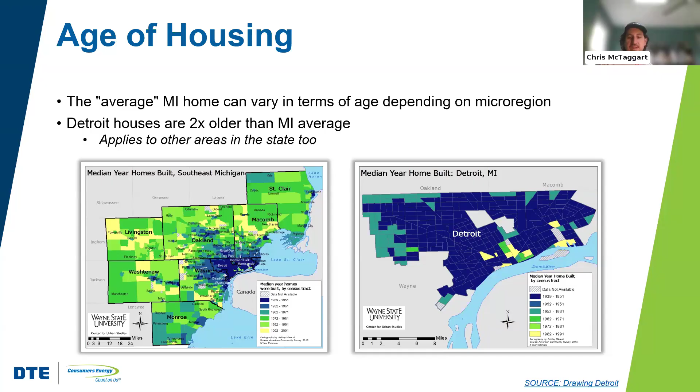Well, it just so turns out that the older the homes are, the more energy intensive they are. And energy intensity is sort of a different way of describing inefficiency, or rather efficiency.

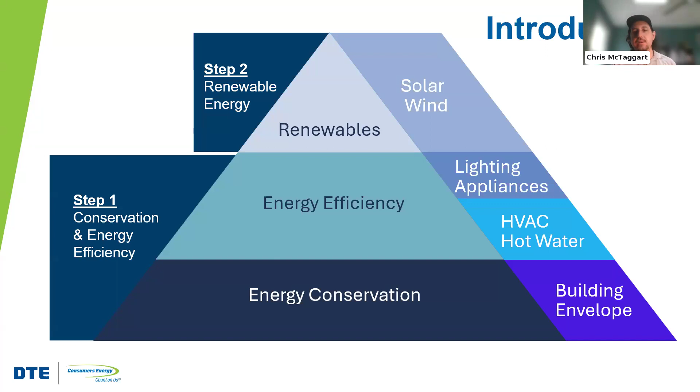I am not feeling drafts in particular right at the moment. So keep that in mind, that reduction in heating and cooling loads can also be a good surrogate for looking at comfort improvements.

You probably want to think about costs. Obviously it depends on the customers. Some customers don't really care - they want the comfort, they want the modernization of their homes, and they believe in energy efficiency for either philosophical or environmental reasons. Consumers who may be renovating their homes may not necessarily care if it's exactly going to pay for itself. They may just think it's the right thing to do, or they may have other motivations. But I think for most people, they're still going to want to understand what their ROI is.

And then finally, how do we scale these upgrades? What order of operations do we do?

So it's leaky, probably. Now, if you haven't done enough existing home audits and things like that, you have to be careful about broad generalizations about air tightness. You can have really leaky new homes, brand new today. It's less common, but it can happen if people have tongue and groove ceilings, and they just don't have a really clear air barrier. You can have pretty leaky homes, or somebody has a big giant chase running to an attic that the code officials missed, and the builders missed. You could still have very leaky homes today.

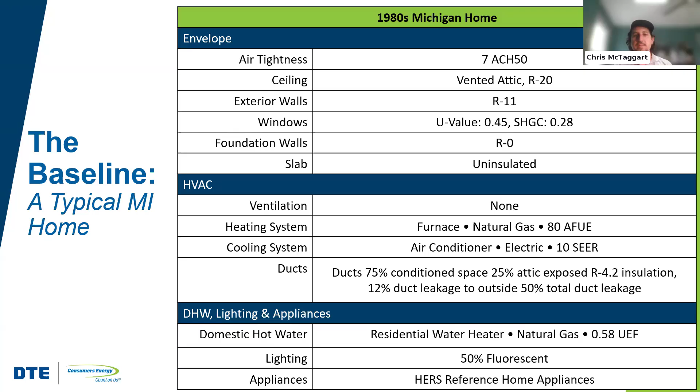All right, so here's how the bills break down. So this is sort of an early 80s home here. We've got a lot of energy going to heat, not surprising. We've got a lot of energy going to lights and appliances, and a little bit going to cooling and water heating. You may go, wow, that's surprising.

I would have figured there was more going to cooling, but we don't have big cooling loads. We just don't. Now, a lot of this depends on occupancy. To be honest, this comes from sort of how the HERS procedures look at a lot of this stuff.

So like the thermostat is set to 78 degrees within the HERS procedures. Yeah, I know a lot of other people who are running it down to 70 degrees for cooling. So it really depends on the user. So take that with a grain of salt.

But I think the point here is that 50% of your costs are going to heating. And that's pretty true. And our index score is about a 130. Look at that, just about what we were sort of riffing on, that probably the average home from the 1980s would be about that. For our heating load, we've got 80,000 BTUs per hour.

So probably the home has 100,000 BTU or maybe even 120,000 BTU per hour, 80% furnace. A big old sucker that makes a lot of noise every time it turns on. And then for cooling, yeah, they probably have a 3-ton, maybe even a 4-ton system installed.

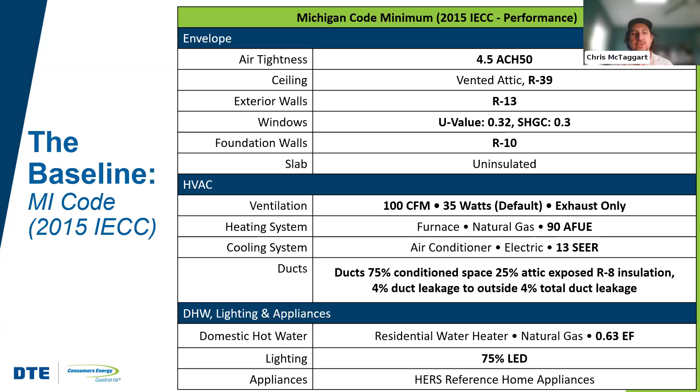So what could we do from a retrofit plan? Again, this wasn't necessarily the retrofit plan, this was just sort of showing you a baseline Michigan performance code home.

So for our retrofit case, here's what we're going to do. We're going to improve air tightness, attic insulation, leave the exterior walls, leave the existing windows, upgrade the foundation walls, put in ventilation, put in a good furnace and a good air conditioner. Nothing crazy and superlative, but we're going to make improvements. We're going to seal the ducts really, really well down to sort of Energy Star levels, improve the duct insulation to R6, and then we're going to put in a tankless gas water heater, LED lighting, and Energy Star appliances.

Our HERS score goes to a 76. So here we go, we didn't mess with the exterior walls. We left those. Why? Well, because they're encapsulated in drywall. You'd have to take out all the drywall.

Maybe you want to do that, but probably not. We left the windows too. Why? Well, because you could make a pretty big impact on efficiency without messing with windows. So we kind of went for the things that were possible to get to, and made those choices. So we got to a HERS score of 76, better than the Michigan Performance Code. And we dropped our heating and cooling loads down substantially, and our energy bill goes down to being less than that of the performance home as well.

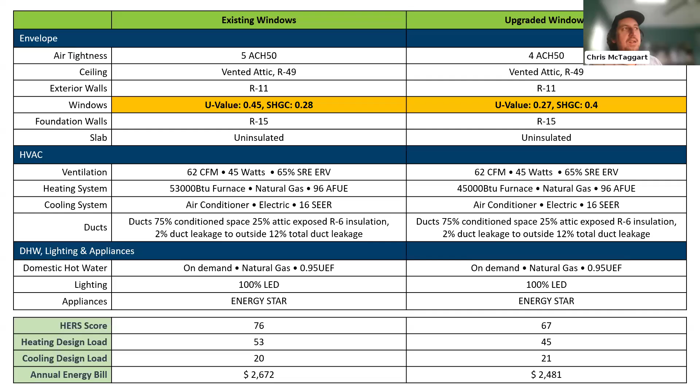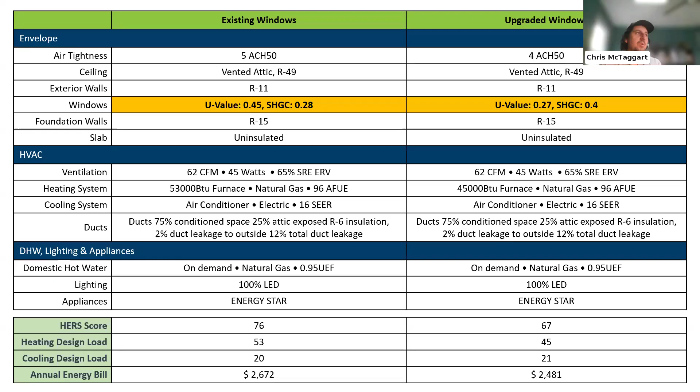For me, I did it for comfort—that was the primary reason—and function. My old windows were covered in lead paint, they were drafty, had poor radiation control, sound came in, and I couldn't really open and close them easily. So my wife and I decided to upgrade because we wanted new windows, and we wanted everything that came with new windows. Energy savings, frankly, is just a bonus. I hate to say that, but I mean it.

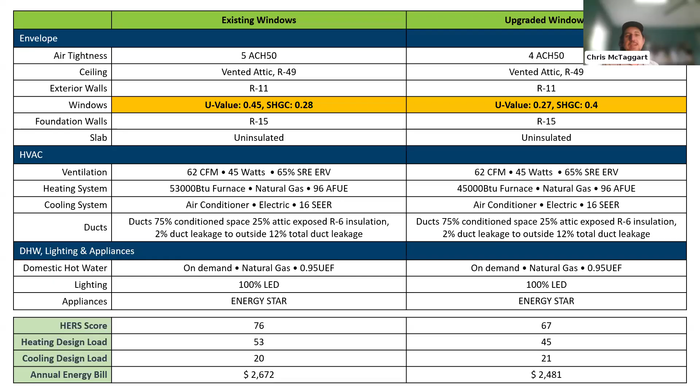Note that the windows we put in were Energy Star certified for a cold climate. You may say the U-factor doesn't seem that great, but with Energy Star windows, a higher SHGC in a colder climate will still qualify you. Going back to our presentation from back in June, we talked a lot about windows, and the reality is a higher solar heat gain coefficient in Michigan can be a good thing because we're not a big air conditioning state.

You can see here the cooling load actually went up a little bit because we went to a higher SHGC package, but our heating load went down—because of less heat loss off the windows, more solar heat gain in wintertime, plus less infiltration.

So I'm an advocate for replacing windows. Just keep in mind, they're not going to pay for themselves more than likely, not anytime soon. It's going to take a long time.

If this is $200 a year that you're saving on windows, and let's say you're the average home and the cost to update your windows is $15,000, that's going to take a long time to pay back—$200 per year, $15,000, so 70 to 80 years, and that's not accounting for other things like had you invested the money, or inflation, etc.

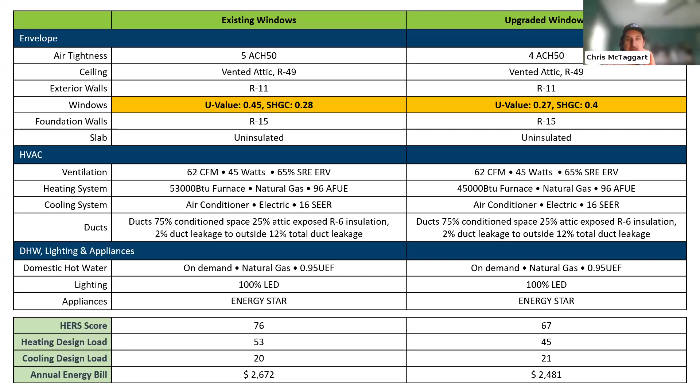Look, I don't care—again, there are benefits to replacing windows, but you're just not going to get a ton of savings out of it.

So this shows the existing windows: 76 on the HERS index, 53 heating load, 20 on the cooling load, $2,700 annually. Here we go—we made an improvement here to upgraded windows, and it saved a little bit of money, saved primarily on heating costs.

Just note the whole pie continues to shrink here, basically because our total energy consumption goes down. So, okay, let's take a look at an example about gas versus electric. Obviously a lot of people are focused on heat pumps nowadays. What happens if we did a heat pump instead of a furnace? Isn't that better?

Well, it depends. I wouldn't say that heat pumps are better or worse necessarily. There's a benefit if you have a heat pump, which is electricity based heating, that if you have the ability to put solar or another form of on-site renewable energy on your home, you might be able to offset some of your heating energy use and cost with on-site power production. You can't do that with gas. Hopefully Michigan's energy grid gets cleaner over time, so that heat pump should have less emissions associated with it. But that's a moving target right now, especially with big data centers sucking up a lot of electricity. It's hard to say where we're going to get all that capacity from. So I'm not personally convinced that a heat pump necessarily makes a home more environmentally sound.

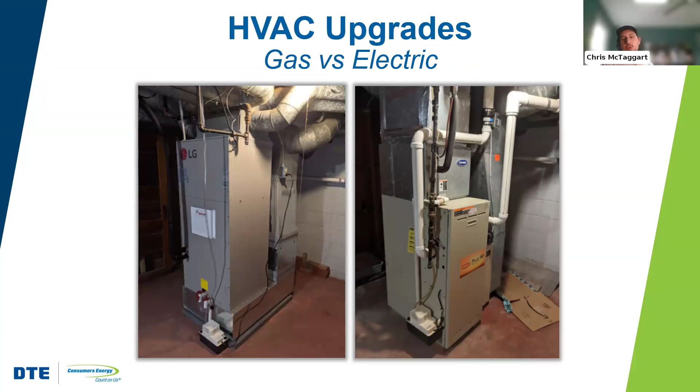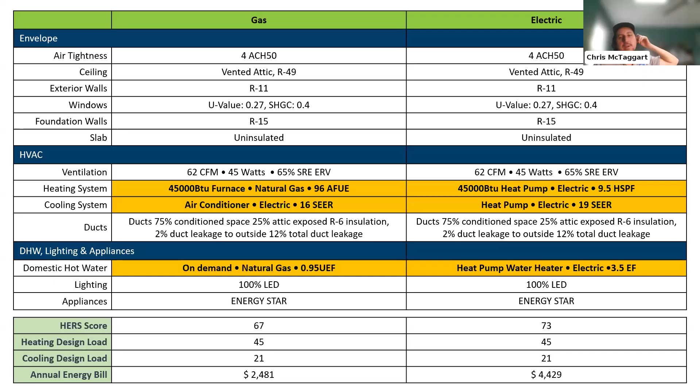Well, how does it look in terms of costs? Here's two examples: that same upgraded window condition, we left the walls the way they were. Same condition, but here's the deal - we're upgrading our furnace on one side on the left, and our water heater to get high performance gas systems on the left, and then on the right we're upgrading to a high performance heat pump for space heating and a heat pump water heater. Note that the HERS index score goes up.

Okay, well, you may say you don't care about the HERS index score. Chris, you kind of said it's a little bit like a game. The HERS score has value, but it depends on what you're comparing. When you do an electric home, you're comparing it to another electric home. If you're doing a gas home, you're comparing it to another gas home. So it's hard to always get an apples to apples comparison on the score.

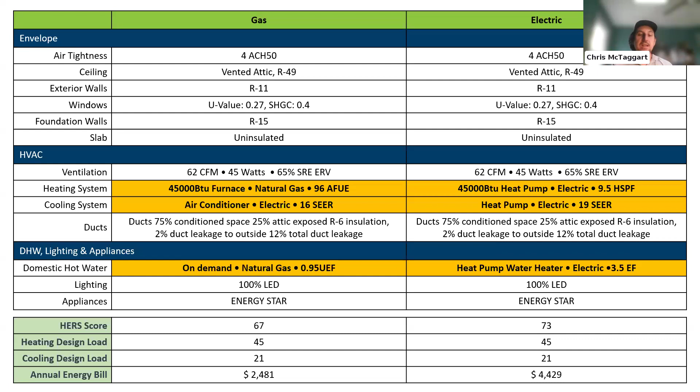But here's the deal, look at that cost difference. Our annual energy bill goes up to $4,400 per year in the electric case versus $2,500 per year in the gas case. So where did that come from? Where's the energy? Well, it's the heat.

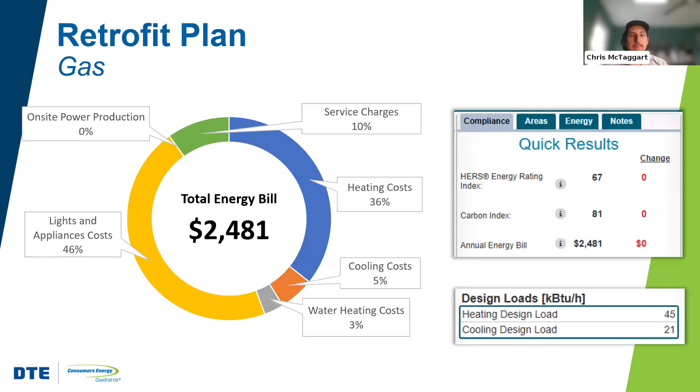Air source heat pumps are good systems, but they're not perfect systems. They are sensitive to outdoor temperature conditions that reduce efficiency at very cold temperatures, and Michigan has some pretty cold temperatures. So by going all electric, our heat bills, our energy bills, are actually more than where we started from. Again, this is $4,400 for electric, $2,500 for gas, and if we go all the way back to the original case here, this was our base case at $3,800.

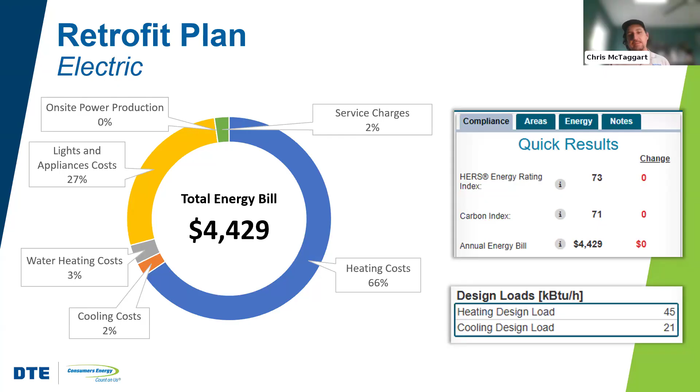Again, I'm not discouraging anybody from getting a heat pump, and this is an energy model - it's not necessarily the perfect God's truth, but the reality of the situation is that just going all electric may save carbon emissions, but it's not going to save your pocketbook in Michigan, because we have pretty expensive electricity in Michigan. So I'm not discouraging anyone from going all electric, but you've got to keep that in mind.

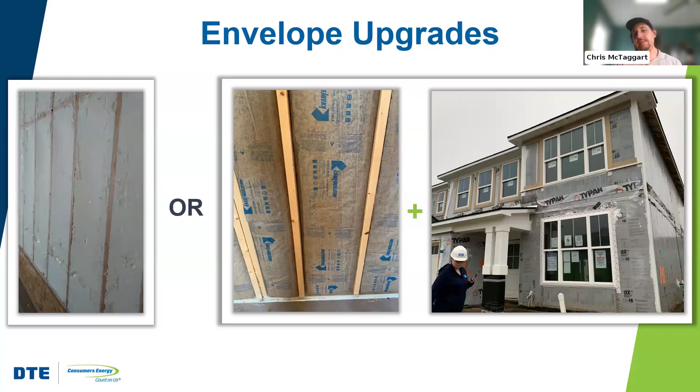Okay, so let's think about other things. If I don't feel good renovating this home and leaving the drywall as it is - what if I have moisture issues or mold behind the drywall - we're just going to do a gut renovation, and we're going to compare if we spray foam those walls full of foam, high density spray foam, versus leaving the existing batt insulation in and doing continuous insulation, meaning we pull the siding off the home and put in 2 inches of foam board and then reside.

So under both of these scenarios, we're saying that the air tightness got a little bit better - it will drop by another 1 ACH 50. Why is that? Well, because by either spraying the wall cavities full of foam or taking off the siding and putting in continuous insulation on the exterior with taped seams, we're able to get more air tightness in addition to better thermal performance.

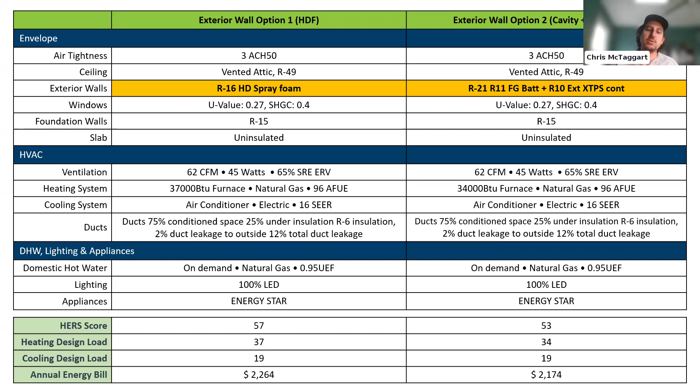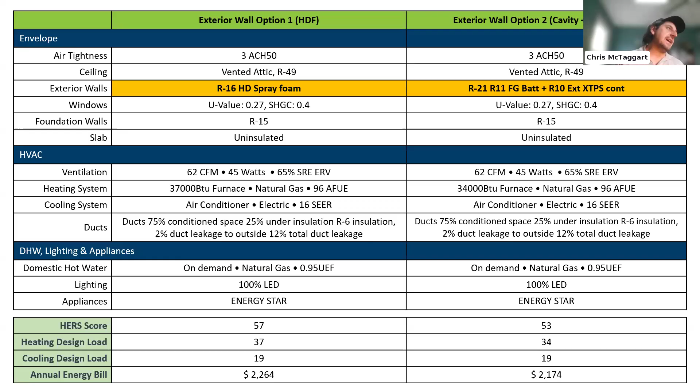So how does this change things? HERS score drops a little bit more. Bills come down a couple hundred more bucks with removing the drywall and doing the interior spray foam job. Whereas with removing the siding and leaving the existing batts but putting on continuous insulation, our HERS score drops even more, and we drop down to $2,200 per year. So now, instead of it being over $300 per month, now you're all the way down to less than $200 per month. So this is, again, the high density foam system.

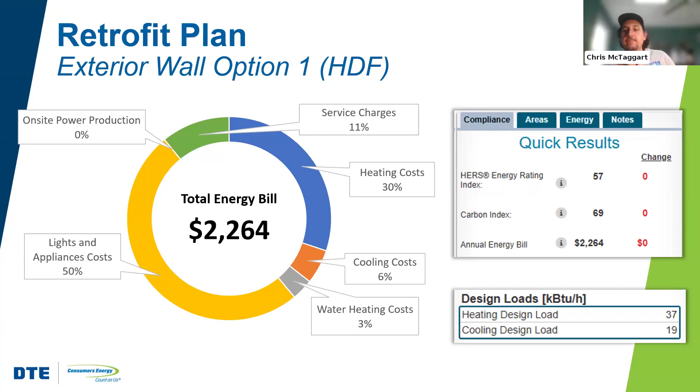Heating costs are at 30% versus exterior wall cavity at 28%. The heating load is about the same, but you can see the benefit of the continuous insulation. It improves the overall thermal performance of the exterior walls by putting on that 2 inches of foam, because our heat design goes down.

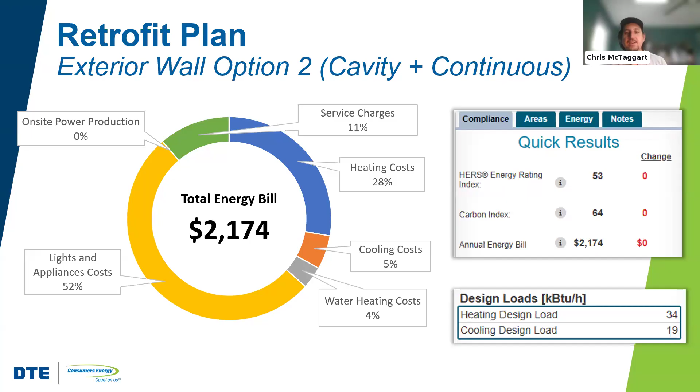So take a look at this. We've gone all the way from 80,000 BTUs per hour as our design heating load, all the way down to 34,000. We've reduced heating demand by a substantial amount, by more than 50%, by taking all these measures. So taking a look at this chart, if you go all the way to exterior walls cavity plus continuous, now you're in that Energy Star version 3.2, 3.3 realm. That's a high performance house.

Good job, everybody. That's great that we were able to accomplish that. It just goes to show that working with a HERS rater who's competent about existing buildings and running through some scenarios can really help homeowners understand better the options that they have.

Now, obviously, you might say cynically, am I ever going to get that money back by doing all these upgrade measures? What I would tell you is do what I did. You don't have to do them all at once. I didn't literally do the entire high performance renovation to my house immediately. Now, you can if you've got the money, resources, time, vision, and contractors. In some ways I probably could have just did it.

I probably should have just done the whole thing all at once, but I was running a business and wanted to do some of the work myself, and I just didn't have time to do it all. So I kind of took it in pieces.